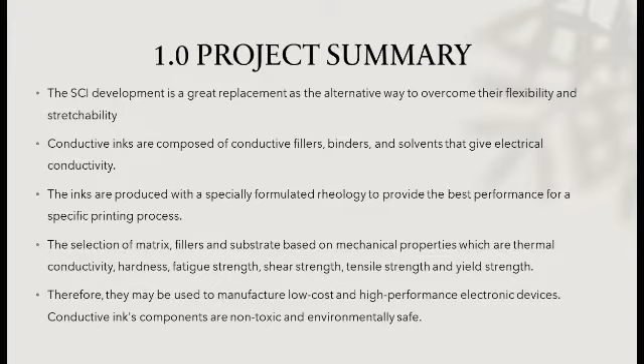Next, the introduction. For the background study, it starts from the realistic. Printed circuit board is used widely in electronic devices, but it faces some problems due to a rigid electronic device that cannot be bent, twisted or stretched. So it is not applicable for some devices. Then it's upgraded to the flexible printed circuit board that can be bent at some point until it fatigues, but it still cannot be stretched.

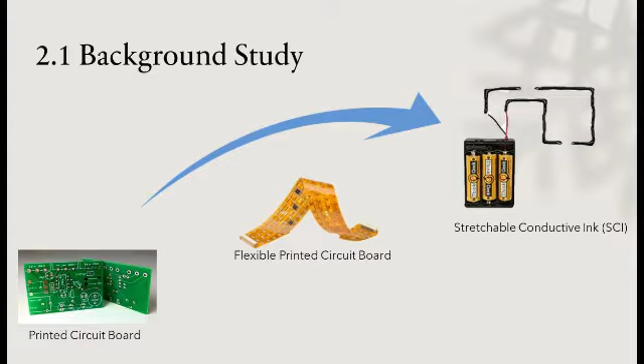Next, the electronic device is upgraded to the stretchable conductive ink to make it more stretchable, so it can be used for multi-purpose. For problem statements, the performance in terms of mechanical, electrical, and thermal performance needs to be carried out in order to establish the SCI by using the new formulations.

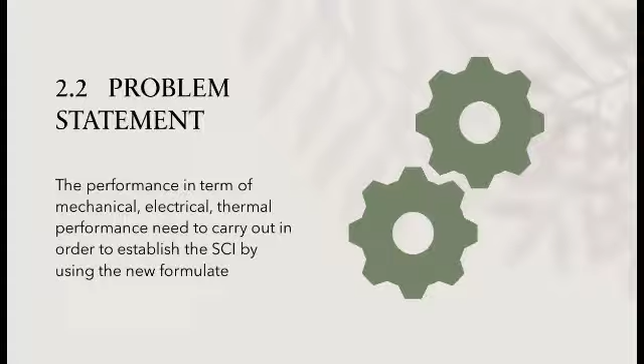Ceramic matrix nanocomposites: intentional incorporation of one or more distinct ceramic phases enhances wear resistance, thermal and chemical stability, and overcomes the brittleness and low toughness impairing industrial potential.

Polymer matrix nanocomposites: fillers serve the role of nanocomponents, which could be one-dimensional linear CNTs, two-dimensional layered, and three-dimensional powdered morphology and silver NPs. High thermal stability, improved mechanical properties, and lower gas permeability.

The metal matrix nanocomposite is a multi-phase material consisting of a ductile metal or alloy matrix having some nano-size reinforcement material. Major properties include high ductility, toughness, strength, and Young's modulus. Significantly, it is used in the aerospace, automotive, and defense industries.

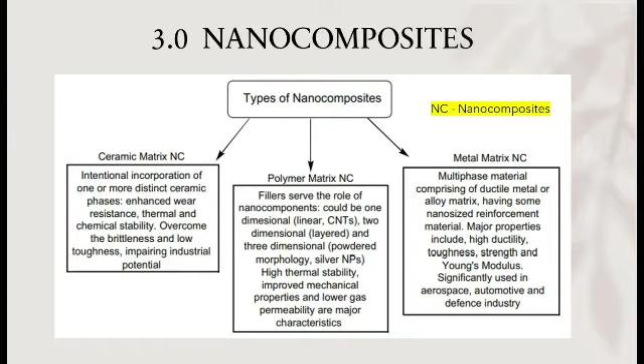All the materials will be mixed together by using a thinky mixer at 400 rpm for 10 minutes. This process is called the mixing process. As the final result from the mixing process, we got final mixtures for the 5 micrometer and 15 micrometer.

Before we apply the final mixtures on the TPU, prepare the TPU substrate with scotch tape and gently clean any dirt by using acetone. After that, apply the ink on the TPU by a manual screen printing process. Then put it into the Memmert oven for the curing process.

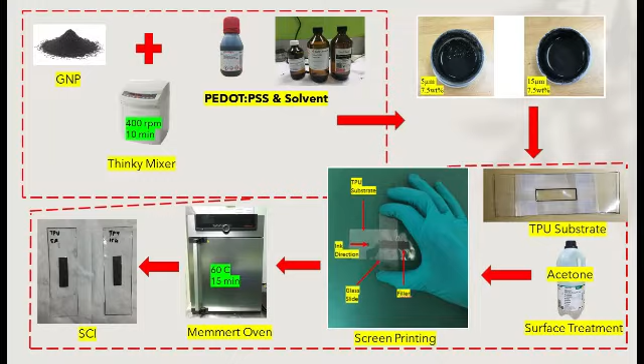Next, I will be presenting about the material characterization. The material characterization will be determined by running the tests for the subjects. First is the mechanical test, cyclic stretch test. The stretch test is performed on substrates such as TPU and PET to evaluate the electrical performance of stretchable conductive ink for every 1000 cycles to 5000 cycles until it is fatigued. It is important to determine the flexibility of the substrate with the filler after a few cycles of the test.

The experiment is set up as in the picture for the stretching test. The holder detaches from the body, making it easier to attach the circuit, and both holders will clamp both sides of the circuit. Then when the spindle is turned, the main body will push the secondary body, causing the printed circuit to stretch, and then the lock mechanism will allow the test rig to hold the position when it is needed.

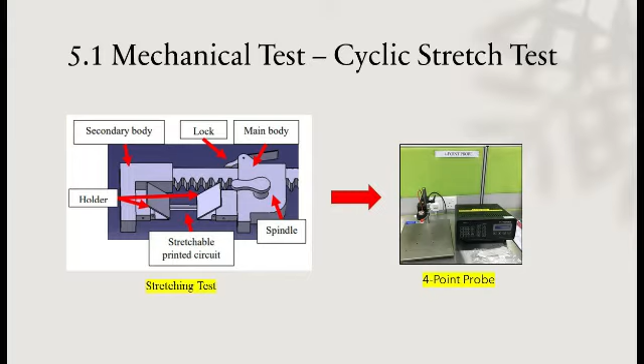For the thermal test in figure A, the conductive ink sample is heated from low temperature, then intermediate temperature and high temperature for 30 seconds. Then the sheet resistance was measured using a 4-point probe, as in the picture before. The reference point for the thermal test is room temperature, which is 22 degrees Celsius.

And then for figure B, the strain test, the sample was stretched at different levels in room temperature condition, under strain levels of 0%, 20%, 40%, 60%, and 80%. The initial length of the sample is 20 mm, and the samples were stretched until they reached the maximum length, which is 36 millimeters. Then the samples were set to stabilize for 30 seconds before the resistance was measured at each strain level. That is for the strain test.

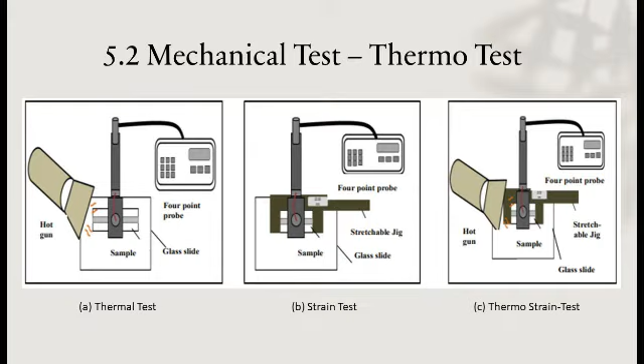As for the thermal strain test, the test is done by stretching the inks at various levels, as in the strain test in figure B, with concurrent heating from room temperature to low temperature, intermediate temperature, and then high temperature for 30 seconds before deploying the 4-point probe to measure the resistance. Next, we move to the conclusion.

Besides, the other important factor is curing or sintering. Mechanical and electrical efficiency, as well as product quality, are greatly influenced by curing temperature. Other than that, the mechanical and thermal effects have been intensively investigated for their potential to improve the overall performance of the SCI.

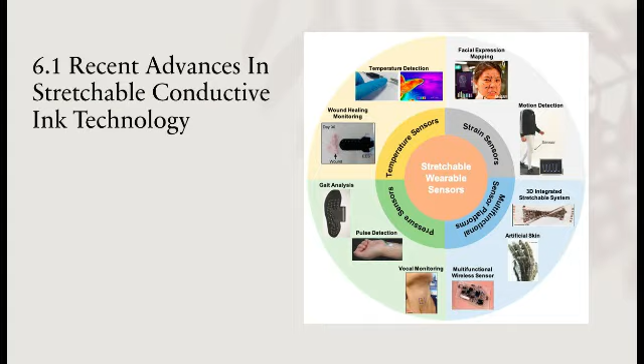Next, we take a look at challenges and opportunities. One of the challenges in developing the SCI is in the printing process. When using printing methods such as screen printing, it is difficult to control the thickness of the printed pattern, which is mostly determined by the stencil thickness. Additionally, there is a challenge in creating extremely viscous and concentrated graphene deposition due to graphene's natural inclination toward aggregation.

As for the opportunities, SCI can be used to cut PCB manufacturing cost. The ink can be used in many applications to create thin, elastic, form-fitting circuits for wearable devices. Besides, a low-cost and quick method of producing the SCI helps to reduce the total production time and expense.